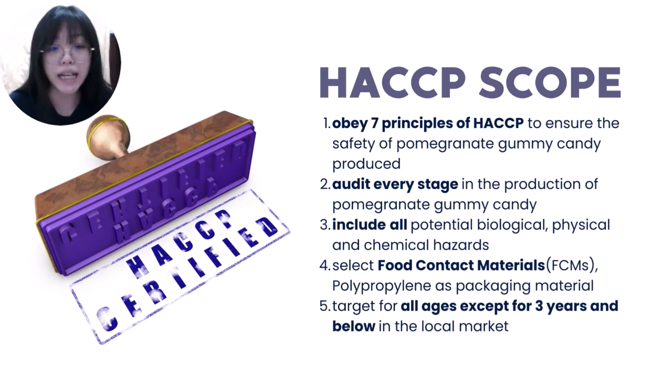Sweet Glacier Company selects the food contact material polypropylene as the packaging material of the pomegranate gummy candy. The target consumers of Sweet Glacier Company are all ages except for 3 years old and below in the local market. Now we will continue with the HACCP team and profile for our group.

We have 1 team leader and 4 HACCP members. Fatihah, the HACCP consultant, is the HACCP team leader. Yong, the quality assurance manager. Me, Gui Qi Xuan, the production manager. Qurratu Ainah, human resource in charge. Naziatul Azzua, plant manager. 4 of us are the HACCP team members.

All of us have the qualification and food working experience. We are also trained in food hygiene and safety, and we accomplish our own responsibility to reduce food hazards in the food industry.

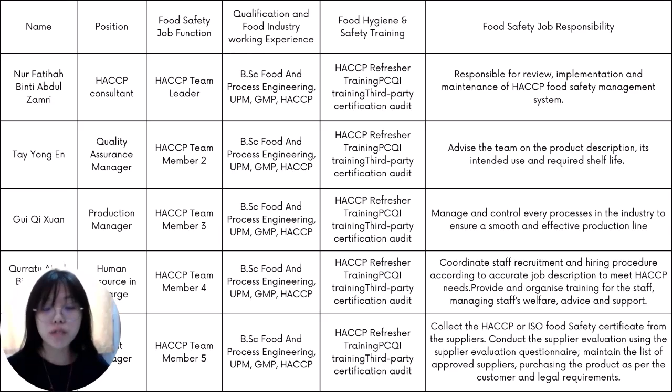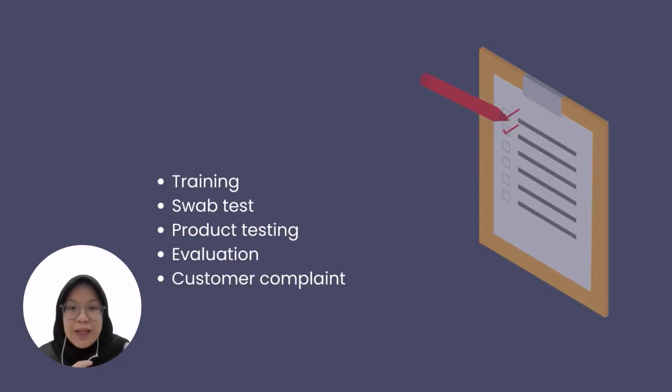So in this part, I will be explaining and showing you our company's food safety objectives, because each company must have food safety objectives according to the HACCP standard. So for our company, we have a few objectives, which are training, swab tests, product testing, evaluation, and customer complaint. So this is our table for food safety objectives, which consists of the objectives that I've mentioned earlier.

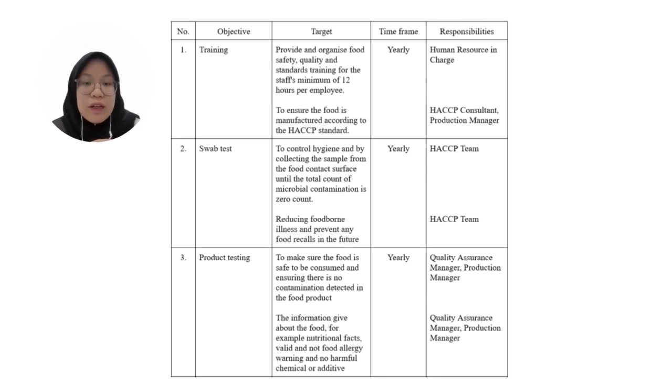First one is training, swab test. Next is product testing, and in the next slide, we have evaluation and also customer complaint. And next, this table also consists of the target based on the objectives, time frame, and also responsibilities of the HACCP team.

Seven is product description and intended use. So pomegranate gummy candies are a broad category of gelatin-based chewable sweets. These gummy candies are in stock in a wide variety of shapes, sizes, and flavors. There are many varieties of jelly candy such as gummy bears, fruit jelly, and jelly beans.

Our gummy candy is described as having a delightful and soft texture. Jelly candy has a delicious flavor and is springy and stretchy, which gives a great texture. It's a delicious and nutritious post-workout snack. Our gummy candies are colored with real fruit and vegetable juices. They are naturally flavored as they are made out of real fruit juice only.

So they are certified USDA organic, and also gluten-free, vegan, non-GMO, tree nut and peanut free, and contain no egg or fish, no concentrated white sugar, no artificial coloring, no preservatives, and no pork gelatin.

So in process description and technology, we have 7 steps, where the first step is receiving the raw materials. The raw materials, which are pomegranate fruit, sugar, gelatin, and food additives, are first received from the supplier. The supplier will be evaluated by questionnaire, and the supplier needs to provide a certificate that the raw materials are free from physical hazards. And the raw material will be taken to X-ray detection to check if it is free from physical hazards before sending it to the dry storage and frozen storage.

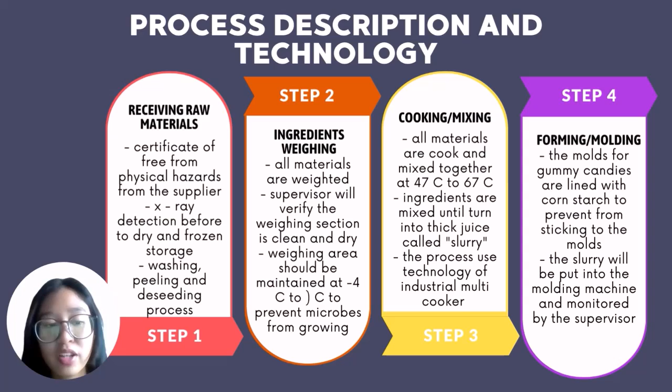So step 5 is cooling and drying. Once the gummy candy is produced, the candy will be sent to the secondary process area, where it will be in the cooling process. The cooling area should be monitored as the time and the temperature must be controlled to avoid temperature danger zones. And the workers that monitor the cooling and drying room must always practice good hygiene to prevent cross-contamination to the candy production.

So the gummy candies are cooled to 18.33 Celsius and allowed to sit for 24 to 26 hours to allow the slurry to cool and set. Once the candy has achieved its cooling temperature, the gummy candy will be moved to the packaging and storing area.

So the next step is packaging and storing. In the packaging area, the gummy candies are removed and placed in a large drum tumbler. The gummy candies are tumbled in a light food grade oil that absorbs any remaining cornstarch and keeps the gummy bear candies soft and fresh. Then the gummy candies will be packed by a candy wrapping machine.

Magnets are installed in the packing area to prevent metal particles. The wrapper is free from chemical leaching, and the proper wrappers used are safe and follow food contact materials, FCMs. Once the gummy candy is packed, it will be stored under room temperature to inhibit leaching and kept away from direct sunlight. Lastly, the candy will be sorted according to orders before the distribution process.

And the last step is the distributing process. The gummy candy is sorted according to orders and finally distributed to local shops and markets. The container that will send the packed candy must be clean and dry, and the temperature of the container must be cool. If the temperature during delivery rises too high, microbes will grow. Hence, the delivery must be extended to the next date or time.

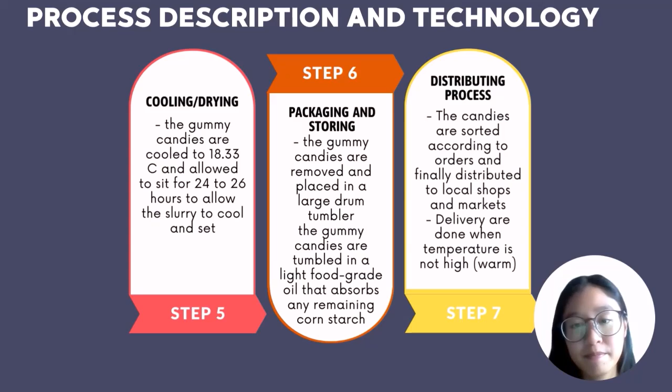So, as you can see, this is the technology that is used to process the gummy candies. A is the cooking unit, which is a multi-cooker, B is the depositor, and C is the cooling tunnel. The next picture is the molding. You can see it is in a gummy size. The slurry will be put into these gummy molds, and before it is put in, we put on the cornstarch so that the gummy, when it is cooked, won't stick to the mold.

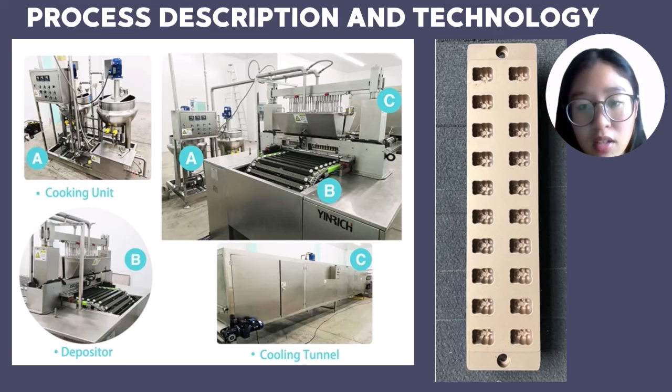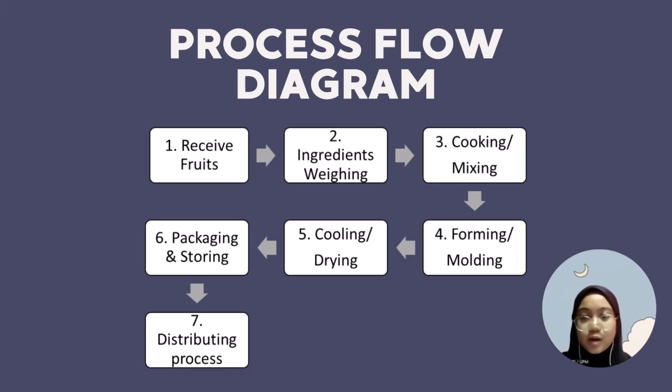The first principle in the HACCP plan is the hazard analysis. First, we analyze the category of potential hazard in every process step. Second, we evaluate whether the potential hazard could happen in the premises or could not happen.

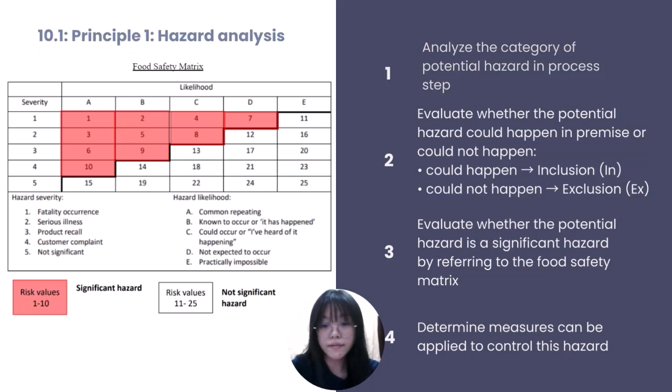The first step of the hazard analysis is to determine the potential hazard that happens in every process step. In the first step of receiving raw materials, we determine that the potential physical hazards that might happen are dust, sand, wood, and metal pieces.

Now we have to justify whether this hazard is an inclusion or an exclusion hazard. As we know, the supplier has an X-ray detection system and provides certification that this raw material is free from physical hazard, we justify that this physical hazard as an exclusion.

The third step, we have to evaluate whether this hazard is significant or not. By referring to the food safety matrix, we justify that this physical hazard can cause serious illness, and the likelihood of this hazard is not expected to occur. Therefore, this hazard is not a significant hazard.

Now we have to determine the measures that can be applied to control this hazard. We will carry out examination of supplier certificate upon receiving, and supplier audit and visual check are also measures applied to control this hazard. By following these 4 steps, we are able to construct a table of potential hazards that might happen in every process step.

We determine and analyze the potential hazards for every process step in the production of pomegranate gummy candy.

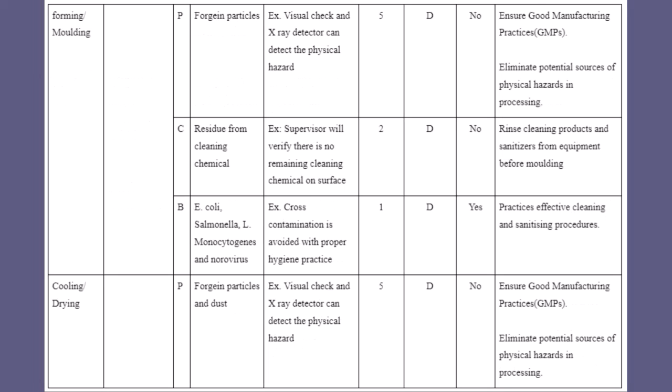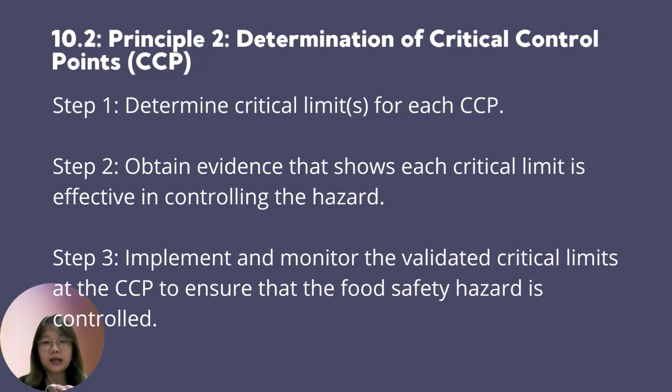After determining the hazard analysis of each process, we need to establish the critical control points, CCP. There are 3 steps in determining CCP. Step 1, determine critical limits for each CCP. Step 2, obtain evidence that shows each critical limit is effective in controlling the hazard. Step 3, implement and monitor the validated critical limits at the CCP to ensure the food safety hazard is controlled. As you can see in the first process, receiving raw materials, pomegranate fruits, the physical hazard is dust, sand, wood, and metal pieces.

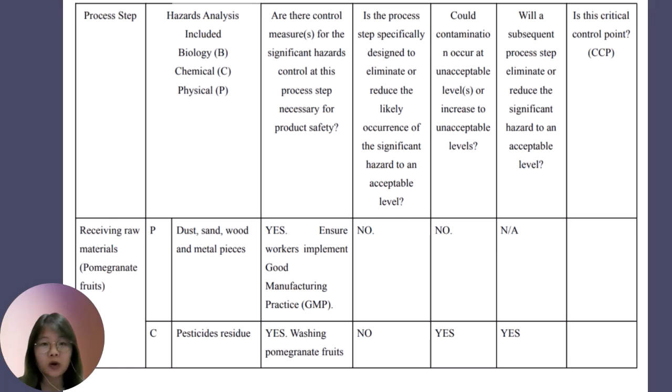The next step is to know whether the control measure for this hazard at this process step is necessary for product safety. The answer is yes. The measure taken is to ensure workers implement good manufacturing practice, GMP. However, this process step couldn't reduce the likely occurrence of this hazard to an acceptable level. At the same time, there is no contamination occurring at an unacceptable level. Therefore, it is not a CCP.

Let's see another example. In the same process, the biological hazards that occur are E. coli, Salmonella, monocytogenes, and norovirus. The next step is the same as before, and the answer is also yes. The temperature needs to be maintained at -4 to 0 degrees Celsius during transportation. This process step could reduce the likely occurrence of this hazard to an acceptable level, hence it is a CCP. The rest of the CCPs are also determined using this method.

Here's the table of CCP which we have determined.

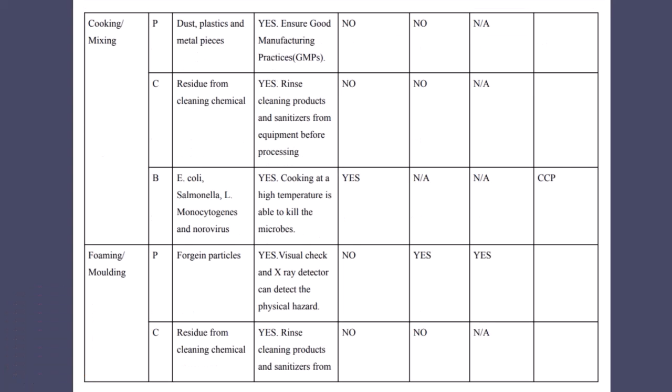After the determination of critical control points, we have to determine the critical limit. What is a critical limit? A critical limit is the maximum or minimum value to which a biological, chemical, or physical parameter must be controlled at a critical control point to prevent, eliminate, or reduce to an acceptable level the occurrence of a food safety hazard. Critical limits can be easily measured and do not involve a lot of analysis or testing on the products.

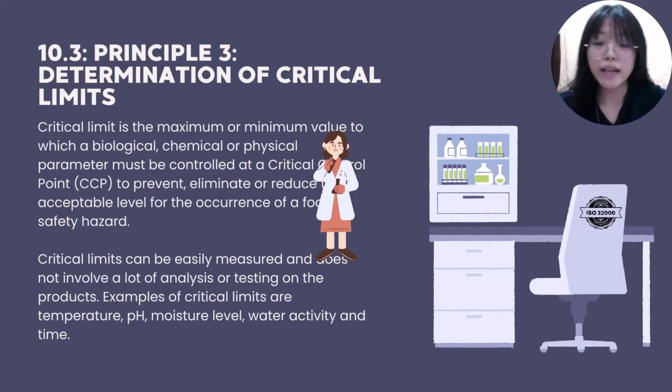Examples of critical limits are temperature, pH, moisture level, water activity, and time. The critical limit for the first CCP is to maintain the temperature of pomegranate fruits at -4 to 0 degrees Celsius during transportation to prevent the growth of microbes such as E. coli, Salmonella, monocytogenes, and norovirus.

The critical limit for the second CCP is cooking at 47 to 67 degrees Celsius. This can help eliminate the growth of microbes. The third CCP is forming and molding. The critical limit is to maintain the temperature at -4 to 0 degrees Celsius to prevent the growth of microbes.

The fourth CCP is cooling and drying. The critical limits for this CCP are the practice of effective cleaning and sanitizing procedures, cooling time for 30 minutes, and cooling temperature at -4 to 0 degrees Celsius to prevent the growth of microbes.

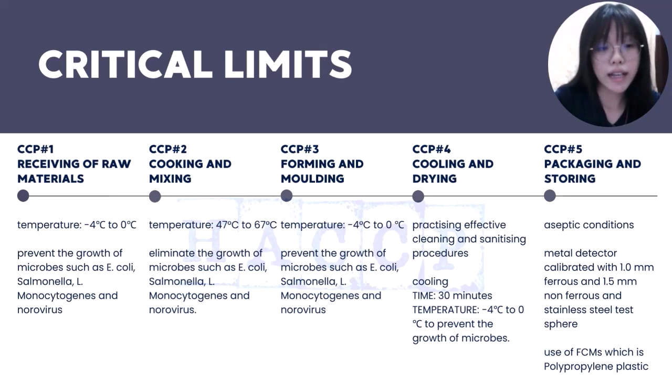The last CCP is packaging and storing. The critical limits are aseptic conditions, metal detector calibrated with 1.0 mm ferrous and 1.5 mm non-ferrous, and the stainless steel test sphere. Lastly, the use of food contact materials, which is polypropylene plastic.

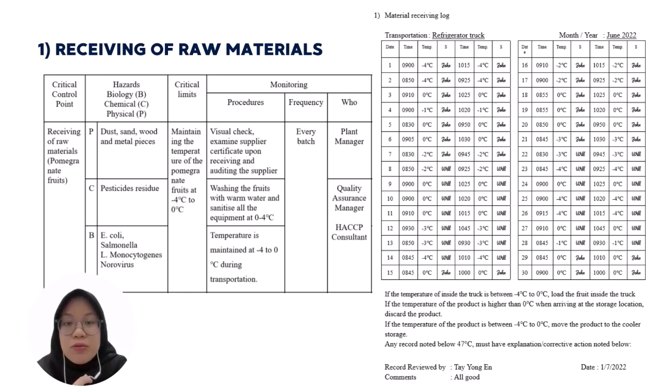As you can see, we have a monitoring table according to the critical limits, which includes the procedure, frequency, and who is in charge of the monitoring procedure, as well as a material receiving log. In the next slides, we have the same monitoring table and log for each critical control point, which is cooking and mixing, forming and molding, cooling and drying, and lastly, packaging and storing.

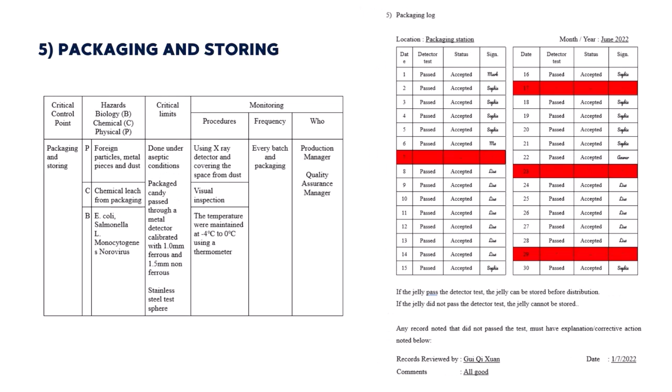So for principle 5, determination of corrective action for each CCP. First CCP is receiving raw materials. We have to reject any doubtful ingredients. First, we have to monitor imports and exports of the ingredients, such as temperature and hygiene.

We have to hold for further evaluation by raw material QC and record in the material receiving log sheet. Next is cooking and mixing. We have to cook the ingredient at temperature of 47 until 67, adjusting temperature and time by setting the equipment well. We have to discard spoilage and rework with fresh material. The person in charge is process QC and production QC, and the record will be the cooking log sheet.

So that is forming and molding. We have to ensure the temperature of the materials is about -4 until 0 Celsius, adjusting the temperature and time by setting the equipment well. The product will be held to check the condition of the material. The person in charge will be process QC and production QC, and the record is the molding log sheet.

Next is cooling and drying. We have to re-dry or sort out damaged or spoilage material, strictly observing the material or the room to reduce moisture, and discard if there is any spoilage. The person in charge will be the lab supervisor and production QC, recorded in the cooling and drying log sheet.

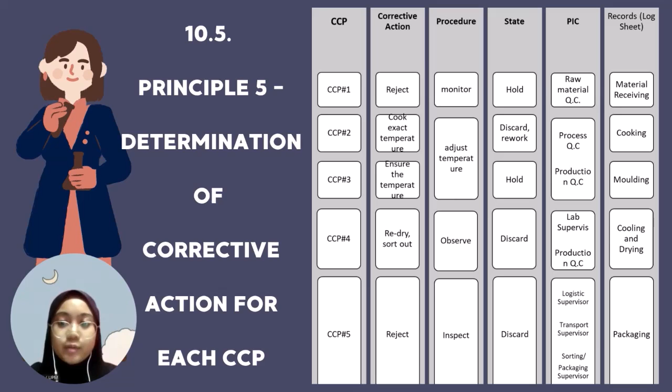In the packaging log sheet. So principle 6, determination of verification process. Validation is making sure that something is true, planning for the food safety plan to succeed and looking into the future. Verification is an action that establishes the truth of something, checking that the food safety plan has worked, looking at the past. So verification is the principle which confirms that the HACCP plan, if followed, will produce safe food for the final consumer.

In the verification process, the process has 3 key components: first is validation—will the HACCP plan ensure that safe food will be produced? Second is verification—is the HACCP plan working, is it producing safe food? And the review is whether the HACCP plan is up to date.

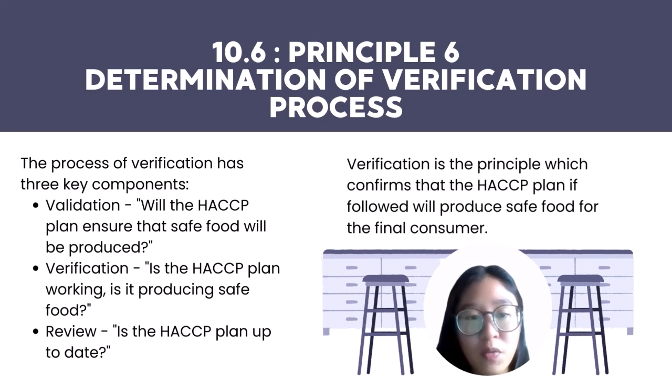So I will show you the table for the determination of verification process. In this principle 6, we have 5 columns. The first column is the verification activity, the second column is justification, the third is the frequency, the fourth is the person responsible, and the fifth is the reviewer.

This verification process starts from the first until the end. For example, the first one, verification activity scheduling: we have to justify if any deviations from the CCP will be recorded and followed up during reviews. The frequency is yearly or upon HACCP system change, the person responsible is the HACCP coordinator, and the one to review this activity is the plant manager.

Second is initial validation of the HACCP plan, and the justification is any deviations from CCP will be recorded and followed up during reviews, prior to and during the initial implementation plan. The person responsible is the HACCP leader, and the reviewer is the HACCP team.

The list goes on for the subsequent validation of the HACCP plan, verification of CCP, and monitoring as described in the plan. For example, we can see in the next slide.

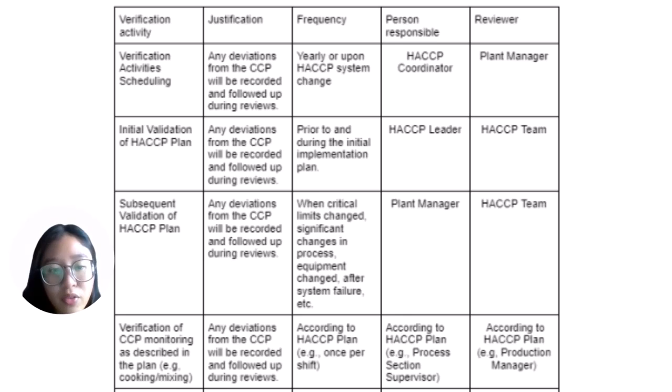So we put in our CCPs: the first one is receiving raw materials, second is cooking and mixing, third is forming, fourth is cooling and drying, and fifth is packaging and storing. The last two are review of monitoring correction action records to show compliance with the plan.

Review of monitoring is based on principle 5, and the comprehensive HACCP system verification. This one is done yearly, the person in charge is the HACCP team, and the reviewer is the plant manager.

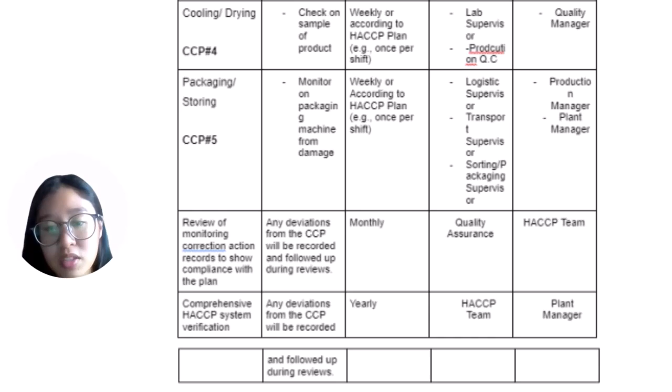10.7, Principle 7 is documentation and report. Firstly, documentation is for reference purposes, and records are for a day-to-day basis on each critical control point.

For the documentation, firstly, we have the summary of the prerequisite program. Prerequisite programs include facilities, supplier control, cleaning and sanitation, personal hygiene, training, chemical control, receiving, storage, and shipping, and lastly pest control. Each prerequisite program has its own control measure. For example, for facilities, the control measure is cleanliness.

And for pest control, the control measure is crawling and flying insects, and includes also rodents.

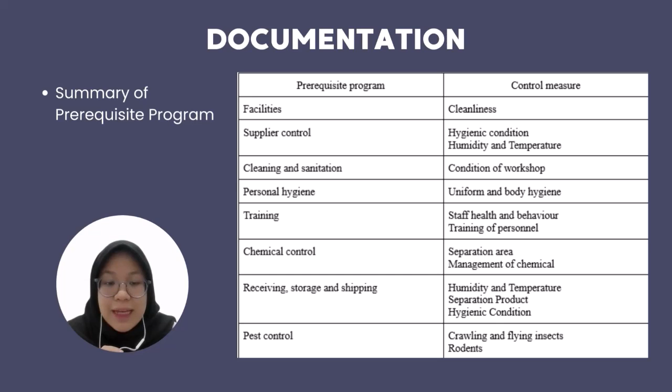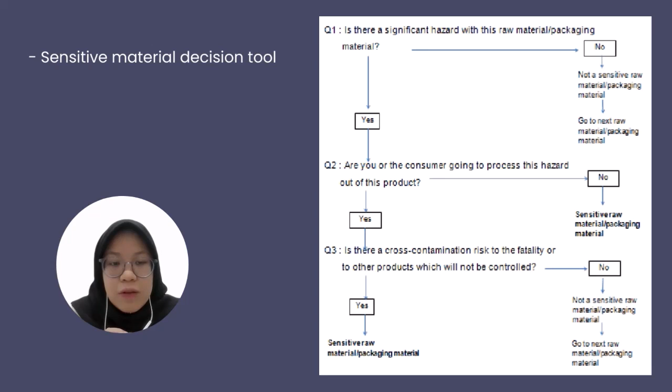For the documentation, we have supportive documents to the HACCP manual. Inside the supportive documents, we have sensitive material. For our company, our sensitive material is pomegranate fruits. To determine the sensitive material, we use the sensitive material decision tool, shown here, with question 1, question 2, and question 3. We follow the path according to our answer.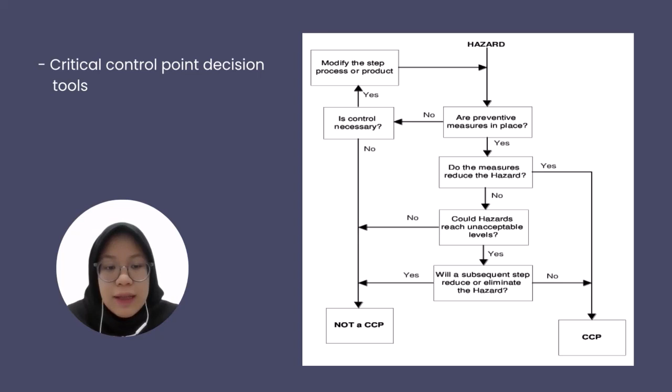Next is the training policy and plan. First is to assemble the HACCP team. Second, describe the product and intended use. Third, procedures and flow diagram. Fourth, identify the hazards and control measures. Fifth, determine the critical control points, CCP, and establish each. Sixth, establish a monitoring system for each CCP. Seventh, establish corrective action and verification procedures for each CCP. Lastly, HACCP plan verification and internal audit.

Customer complaint procedure. First, we review and compare customer complaints in the past with the present. Second, categorize the customer complaint into different categories such as microbiological, chemical, physical, quality, allergens, and regulatory. Third, investigate if the individual hazards have been assessed as part of

your HACCP plan based on your hazard analysis. Fourth, document any hazard that has not been identified and complete the risk assessment. Lastly, cross-reference and document any customer complaint within your hazard analysis.

Food recall and procedure. First, we decide whether the food needs to be recalled. Second, establish a food recall team. Third, information on the food safety incident is gathered, such as production and sales record, employees, suppliers, complaints, audit, and sample analysis.

Fourth, notify the relevant authorities. Fifth, isolate the affected products in your control. Sixth, notify the consumers. Seventh, monitor the progress. Eighth, control the products that are recalled. Ninth, dispose of the recalled products. Lastly, investigate and fix the cause of the recall.

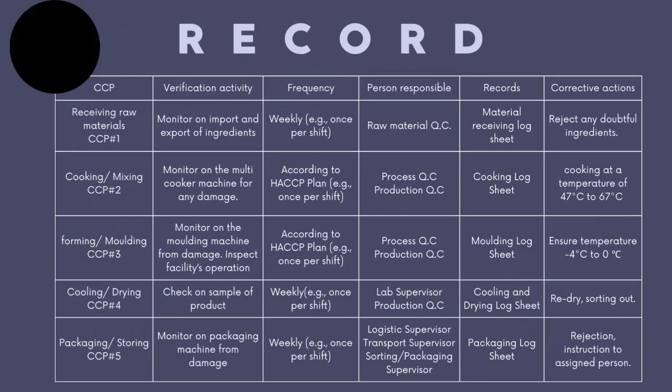Record in HACCP, we have to record the CCP itself, the verification activity, frequency, person responsible, record, and lastly corrective action. In this product, we have 5 CCPs.

For the first one, receiving raw material, we monitor on import and export of ingredients. We do it weekly, but once per shift. The person in charge is raw material QC, and we record it in the material receiving log sheet. They will reject any doubtful ingredient.

Next is cooking and mixing. The person in charge will be process QC and production QC. They monitor the multi cooker machine for any damage, once per shift according to our HACCP plan, recorded in the cooking log sheet. They should ensure cooking at a temperature of 47 until 67.

Next is forming and molding. The person in charge will be process QC and production QC. They monitor the molding machine for any damage and inspect the facility operation, once per shift, recorded in the molding log sheet. They should ensure the temperature is -4 until 0 for the CCP part, cooling and drying.

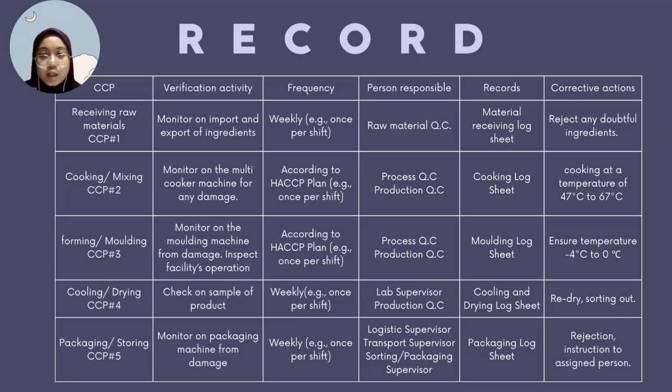Lastly is packaging and storing. Monitor on the packaging machine for damage, and the person in charge will be logistic supervisor, transport supervisor, and sorting packaging supervisor, recorded in the packaging log sheet. They will reject and discard any damaged product.

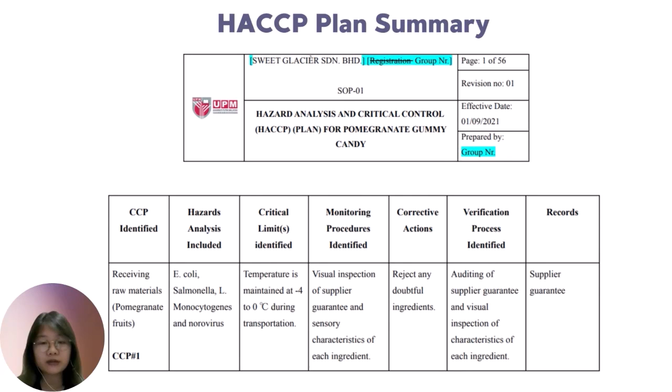In summary, there are 5 CCPs in this HACCP plan. These CCPs are to prevent the food safety hazard and to make sure of the best food quality.

In conclusion, this HACCP plan can prevent food safety issues from arising in the product pomegranate gummy candy and ensure a desired food safety level to achieve the basic and legal requirements on food safety. This HACCP plan also enhances the confidence of customers on the quality of pomegranate gummy candy and achieves the vision of Sweet Glacier Company to become a prominent international brand associated with high-quality candy products.